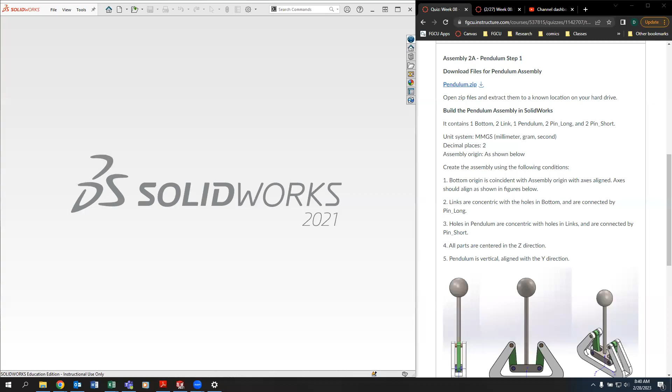Hello again, class. Today we're going to take a look at a practice assembly problem. In this case, I have a pendulum that is composed of a bottom, two links, one pendulum, two pins that are slightly longer, and two pins that are slightly shorter. And we've got them some kind of nice colors here. We can see with the different colors. We know we're in millimeter gram second.

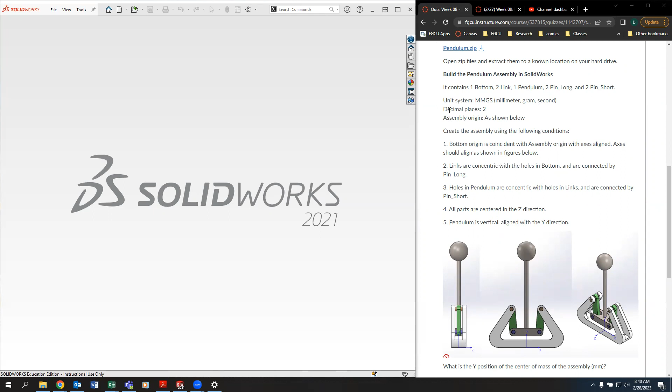So let's go ahead and create a new assembly. And we know we want this to be in millimeter gram second. Oh, it wants us to open a part. I'm just going to hit cancel for a second here, so I can change this to millimeter gram second. I haven't downloaded the parts yet, so I'll go ahead and download the parts.

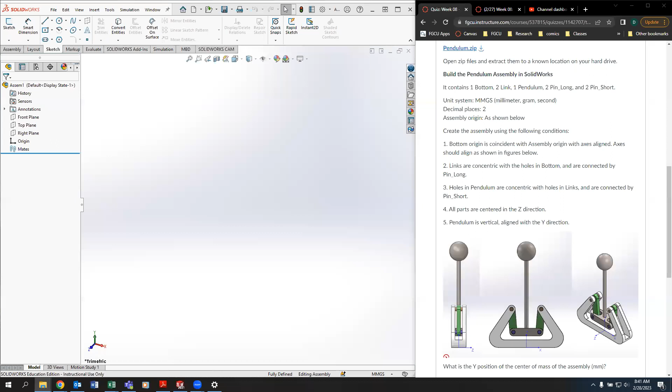I would always recommend that you unpack these files from the zip, if you're given a zip file, somewhere into your computer. I usually recommend using a new folder. So I might make this go into a folder on my desktop or a folder somewhere else on the computer. In this case, I'm just going to put them in the downloads folder. And that works fine for now.

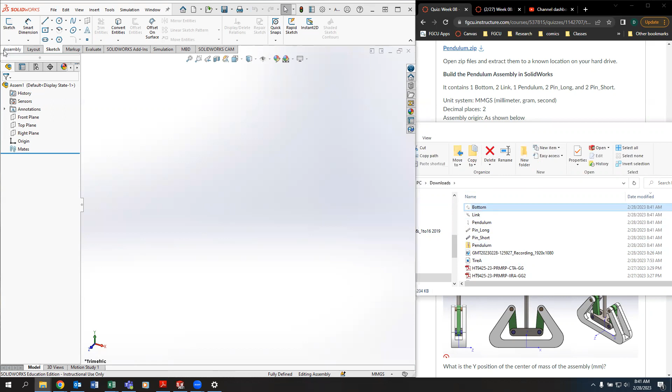So here, I'm going to have the bottom as the first part. When I'm working in SolidWorks in an assembly, I would always recommend that you have the first part be the part you want to have fixed. And typically, if you're given a part with an origin in a specific position, if you bring in the first part and then click on this green check mark, don't click on the screen, click on the green check mark. That's going to make the origin of that first part align with the origin of the assembly. And most of the time that locates the origin in the position that you want for the assembly process.

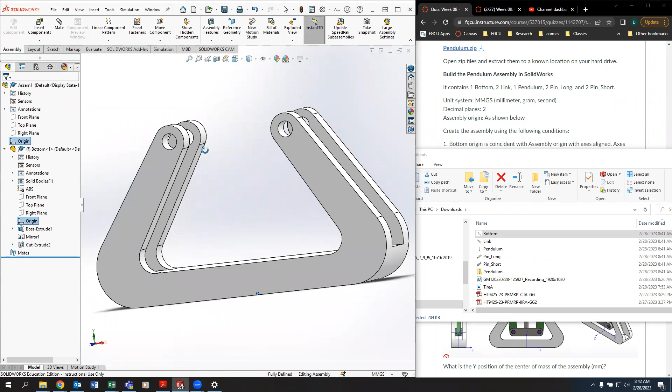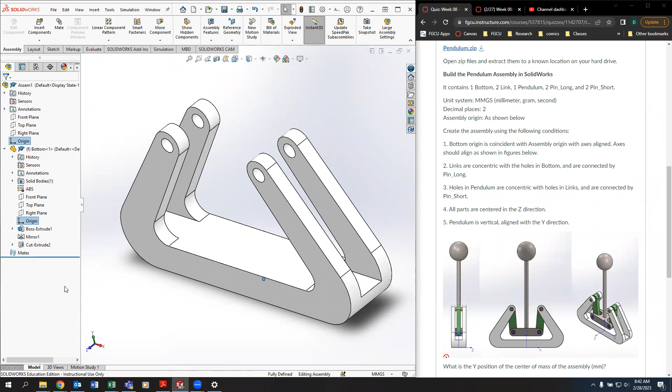We can check and make sure that's correct by looking at our diagram here. We can see that the origin is in the middle of the bottom of the part, and it's got the Y in the vertical direction, the X in the right direction, which you can see here, Y up, X to the right. And if I look at it from a different view, here you can see the Z is coming kind of down to the left, here it's going down to the left. So I'm very confident that the orientation of this part is correct, and it's fixed so it can't be moved around as I add other components.

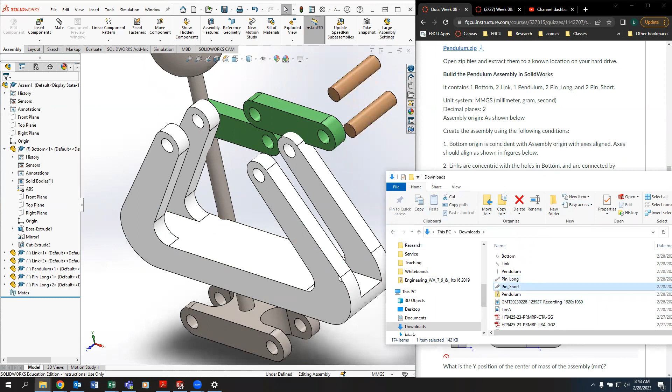Now I have two links, so I'm going to bring in two links, 1 and 2. I'm just dragging and dropping these from slightly off screen here. I have one pendulum, so we'll bring in one pendulum. We have two long pins. Let's bring in our two long pins. And we have two short pins, so I'll bring in our two short pins. And that should be all the parts that we need. We can get that out of the way.

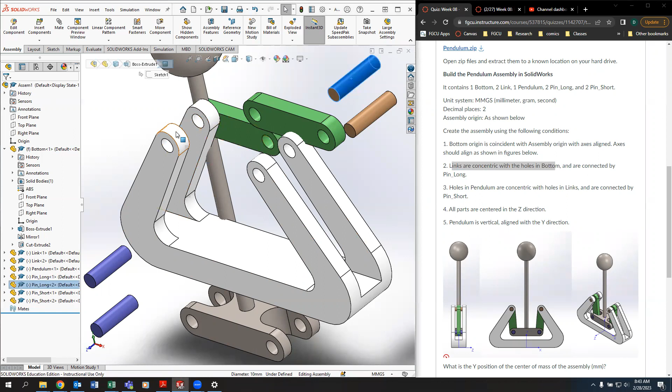The assembly is in the following conditions. So the bottom origin is coincident with the assembly origin with the axes aligned. We already checked that, so we're good there. The links are concentric with the holes in the bottom, so these holes here, and are connected with the long pin. So the long pin connects the links to the holes on the bottom part. So let's go ahead and put those in place.

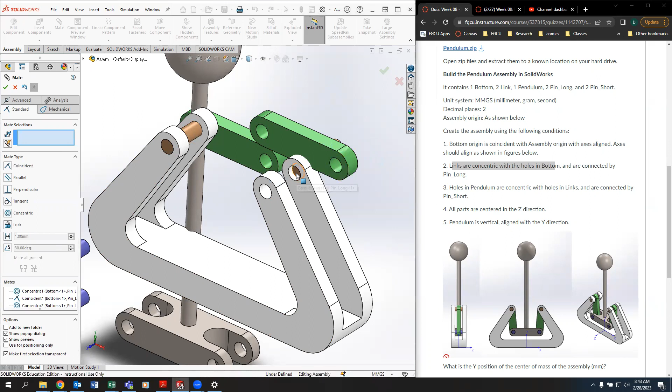I'll use the mate tool. I'm going to start with concentric. And then I want this to be lined up on the side. So I'm going to check and see if these pins are just kind of the right length to fit in perfectly. Looks like they are, so I'll accept that and then do the same thing on the other side. So again, adding a concentric mate, then adding a coincident mate between the face of the pin and the face of the bottom. Those look great, just like that.

And then we'll do the same thing for the links. So I'm going to put that in place there. Again, that's just a coincident relation. Move it a little bit out of the way. Not sure what I did there.

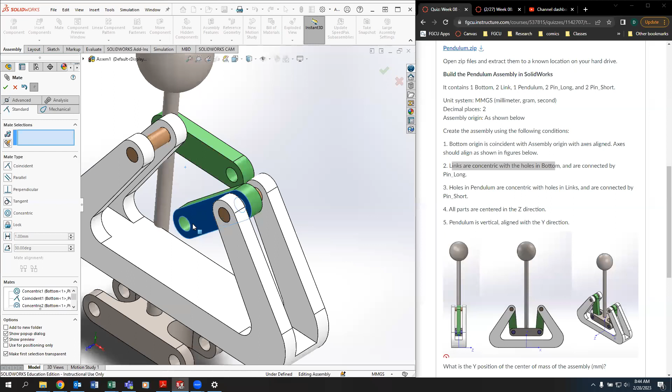I'm going to use Control Z. I'm just going to add the mate again. Probably I didn't click on the green check mark before I tried to move that, and it changed the type of mate that I was adding. So another thing to be careful of here: if I click, then it makes the selection. If I drag, it does not. So if you hold the mouse down and drag it around, it's not going to select. It'll allow you to move things.

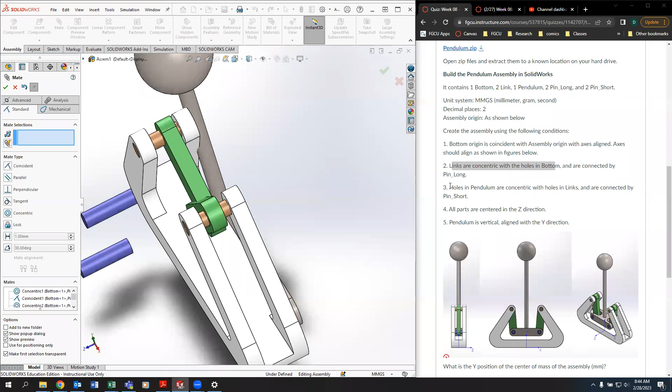So I'm going to click both those, make those concentric. That looks good. Drag this in a little bit. It looks like that doesn't fully fit the slot there. It looks like it's probably centered in that position. I haven't gotten to that point in my instructions yet, so I'm going to keep going before I add any more relations there. The holes in the pendulum are concentric with the holes in the links and are connected by the short pin. So kind of like I just did for the bottom, I need to get this pendulum in place. So let's add some more concentric relations.

There's concentric there. Let's check and see if this pin fits just perfectly in the pendulum. Looks like it does, so I'll accept that. And then we'll do another one for the other side. So again, concentric there. And we'll do coincident on the face of the pendulum to the side of the pin. That looks good. And then we'll make the pins on the pendulum concentric with the opposite ends of the links. I'm going to accept that.

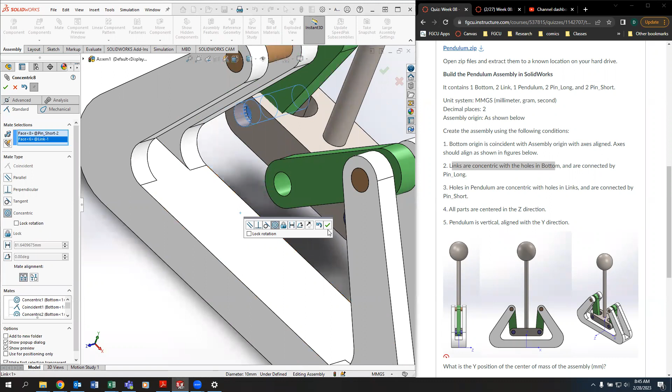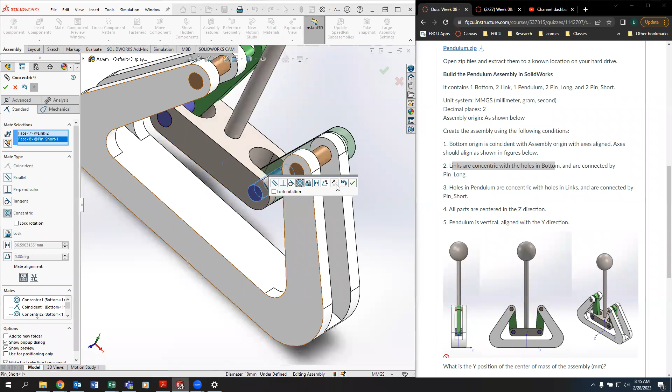Again, I'm going to move this around a little bit to get closer to where I want it. Depending on where you click on these, you can have a hard time moving them in place. If you're having a real hard time with that and it's not getting to where you want it, just try and grab someplace else. Usually you can get it oriented close. And then once you're reasonably close, you can go ahead and continue adding more mates. You do want to make sure you're getting this into a position that makes sense with what you have. So it makes sense to pull these things together and move them into a place where the configuration isn't going to get messed up if I add additional mates.

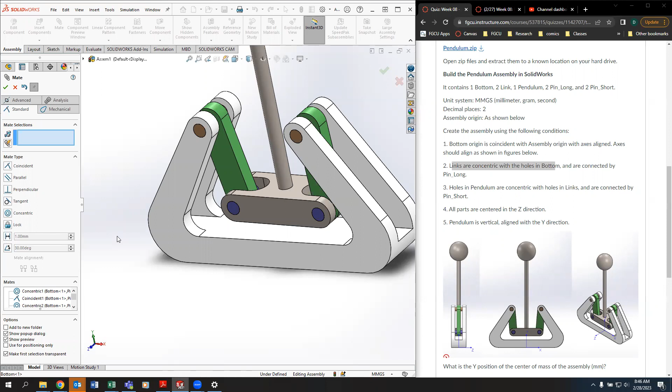It will define the alignment of the mates based off the position of the parts. So if it's flipping your parts around and doing them all weird, check and make sure that you have the appropriate set of constraints, or maybe you need to flip them using the options that show up down here. That looks pretty good. All parts are centered in the Z direction. So I need to have something that's going to center these parts in this plane.

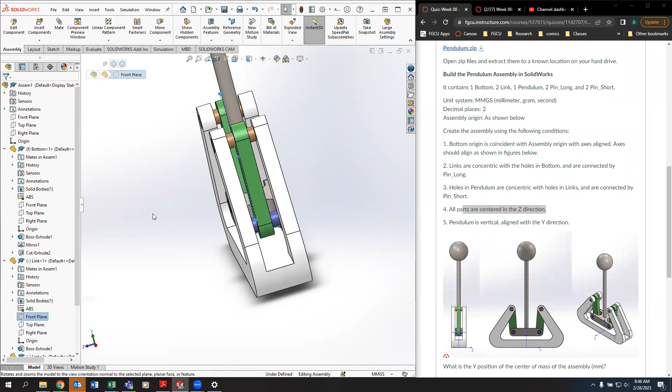I like to look and see what I have in terms of reference planes. So here I have a front plane and a front plane because this is my bottom part. Those are aligned. On my links, again, I have a front plane that's going to the middle of the link. So if I want those middles to line up, I can control click both of those. And then again, we can add the mate to make those middles coincident. And that's going to keep those lined up. I can look for a similar thing on the opposite link.

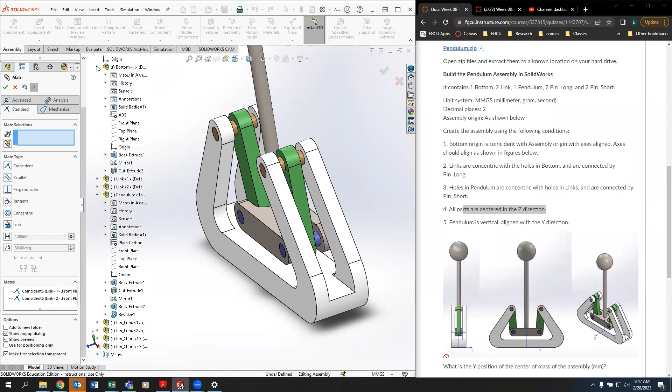So there was link 1. Let's go to link 2. Again, it has a front plane and the front plane of the assembly. I'll accept that. And can I do the same thing for the pendulum? We'll look at the pendulum. Let's hide the links so we can actually see all these. So this is the pendulum's reference planes. Again, it also has a front plane that goes through its middle. So again, I can put that on the front of the assembly, and that's going to define the position of all these guys in this left-right direction.

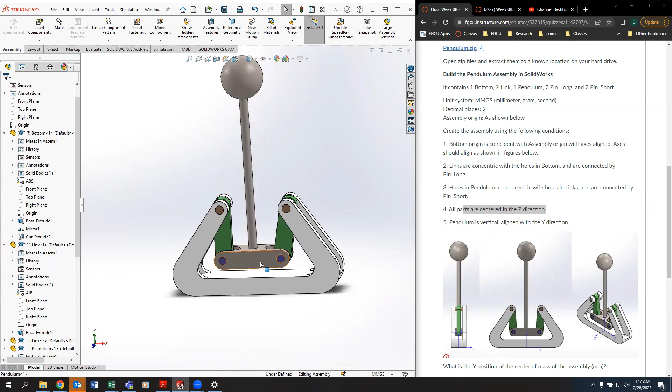So the only thing that's left is kind of the rocking movement of the pendulum, which makes sense because if there's a pendulum, I do want it to be able to rock back and forth. So that looks good. I do need to get rid of that last degree of freedom, that movement of the pendulum. And so to get that fully defined, I need to add some more constraint on here. The pendulum is vertically aligned with the Y direction. So I want this pendulum to go straight up in the Y direction.

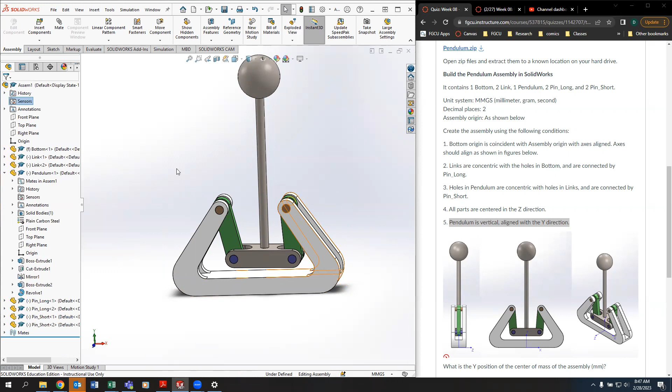And to do that, I think I'm going to go back to the reference planes of the pendulum and see if there's something I can define as being vertical. So there's the right plane of that. Again, if I align that with the right plane of my assembly, then that's going to be vertically aligned and fully defined. So let's go ahead and mate those two. And that should give us a fully defined pendulum.

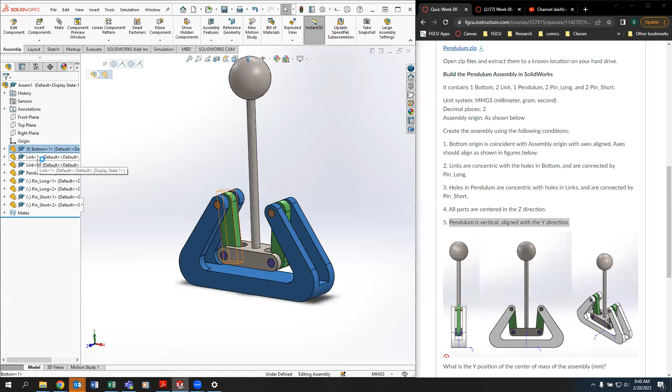So we can look through here. Our bottom is fixed. That's good. We know it's in the right position. The links are both fixed. They're both fully defined. With the mates, I can't move them. Pendulum is also fully defined. The only thing that's underdefined is my pins. But if I try and move or rotate them, really the only thing I can do is rotate them about their origin, which isn't going to change their center of mass location. So I'm okay with leaving that underdefined.

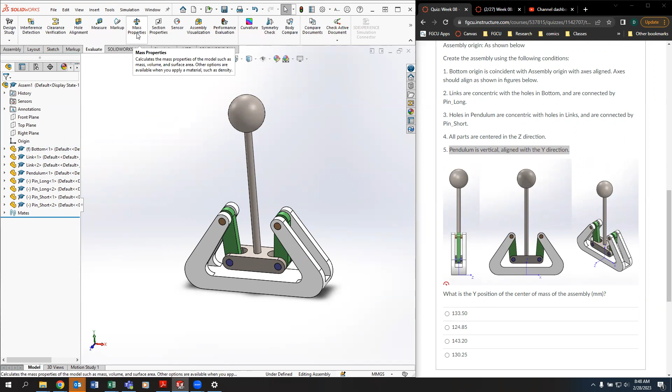So, all right, this wants to know the center of mass position in the Y direction. So I'm going to come into my evaluate tools and look at mass properties. I've got to rebuild, probably want to save this as well. But I have the center of mass in the Y direction as being 133.5. Check that versus the options here. I do have an exact match, so I'm pretty sure I've got that correct. And I can go on to the next part.

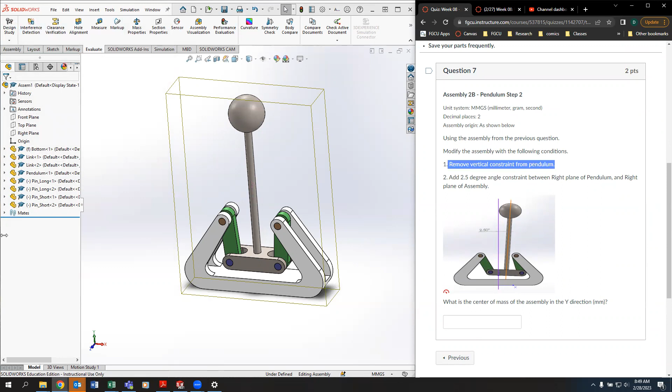Next part here, it says using the assembly from the previous question, modify the assembly with the following conditions: remove the vertical constraint from the pendulum. So I'm going to come to the coincident that I added between the right planes, and I'm just going to suppress that. That's going to remove the constraint keeping these vertical. So now they can rotate.

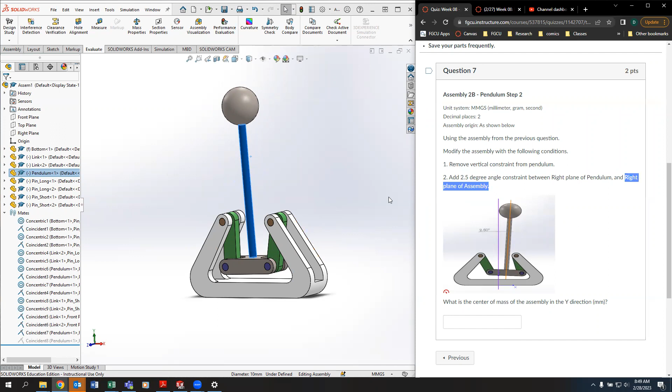And I need to add a 2.5 degree angle constraint between the right plane of the pendulum and the right plane of the assembly. That makes it very obvious what I need to do here. I need to go to the right plane of the assembly, because it's right here, and the right plane of the pendulum. So I'll click on both of those. And I will go into assembly mate. So this is pretty much the same mate I had before, but this time I want to make it an angle mate of 2.5 degrees.

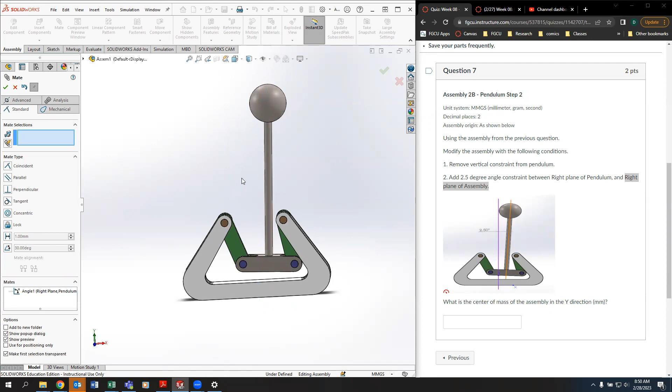On these, be careful about directions. So you notice that mine is going in the negative X and theirs is going in the positive direction. So I'm just going to flip that dimension. So now mine is going in the positive X direction and theirs is going in the positive X direction. That's pretty good. We'll add that. And now I should be able to, again, evaluate the center of mass of the assembly. So I'll go into evaluate center of mass and I get 135.38. I'll copy that and paste it in. And that should be good.

One quick note on this is that if I click on one of the parts and then click on mass properties, it will give me the center of mass for just that one part and not the whole assembly. So before you do mass properties on the assembly, make sure you don't have anything selected and make sure you have the assembly shown as what it's giving you the properties for, unless the question is asking specifically for the center of mass of a specific component.